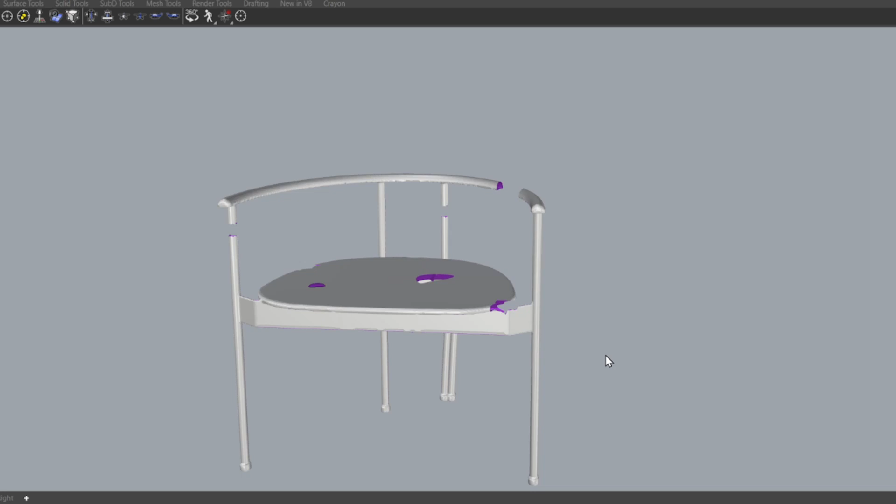In this video we'll be repairing this mesh, which has several holes, missing parts and some misalignment. So to start off with, I'll go to shaded view and inspect the holes in the mesh.

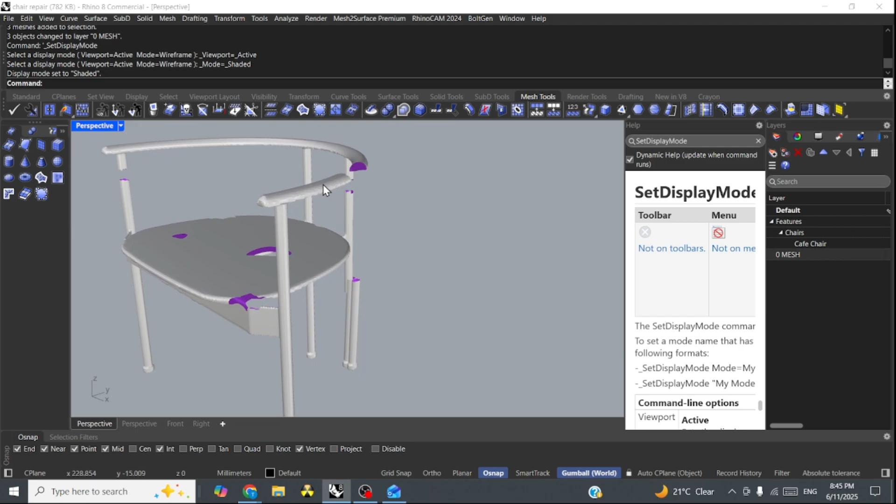So we'll just repair them one by one, starting with this one. To fix this, I'm going to sub-object select and scale to 0. Same for this one, hitting the scale button and typing 0.

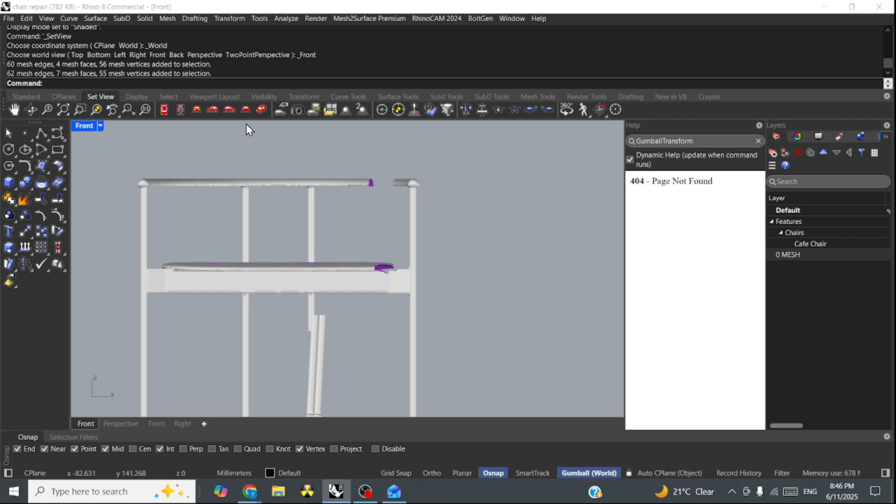This one up here, we can use the repair fill mesh hole in the mesh toolbar. You have to click on the mesh edge and it will fill it in automatically.

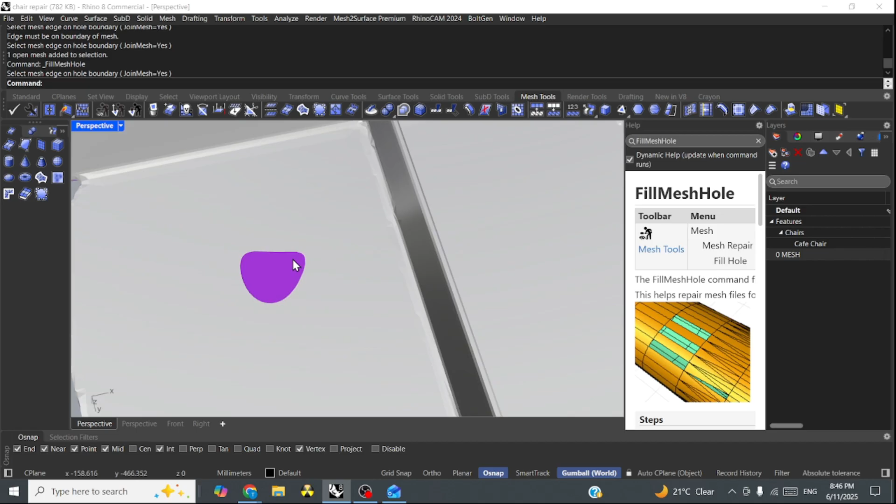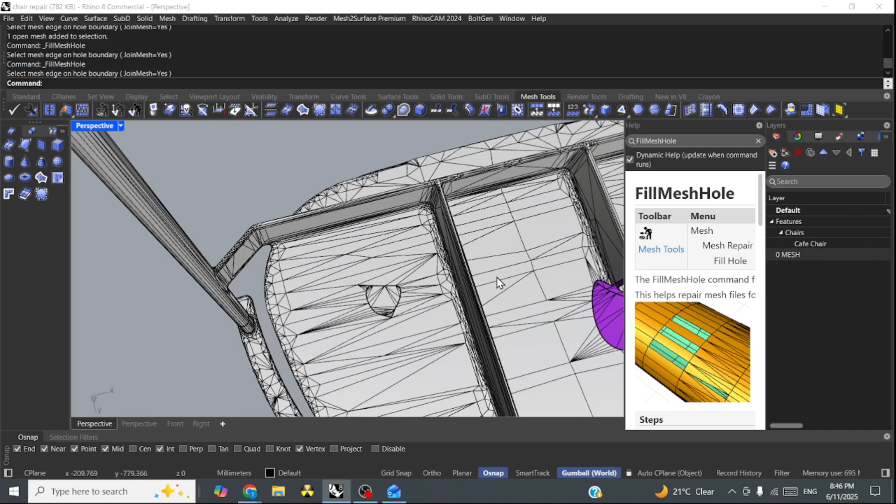Do the same for this one. If you want to see where the mesh edges are, you can turn on your mesh wires in the display tab. This can be handy for this command so you can see which edge you can click on, and also you can see the structure of the patch on your mesh.

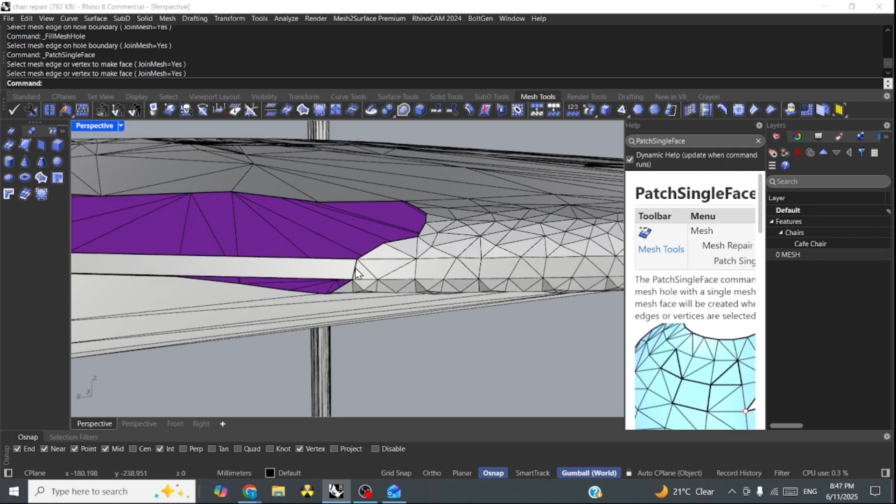Okay, we've got a bit more of a tricky one over here, so we'll use the add a mesh face. Click on that icon and then click on 2 areas and you can make a single face. We'll do it here as well.

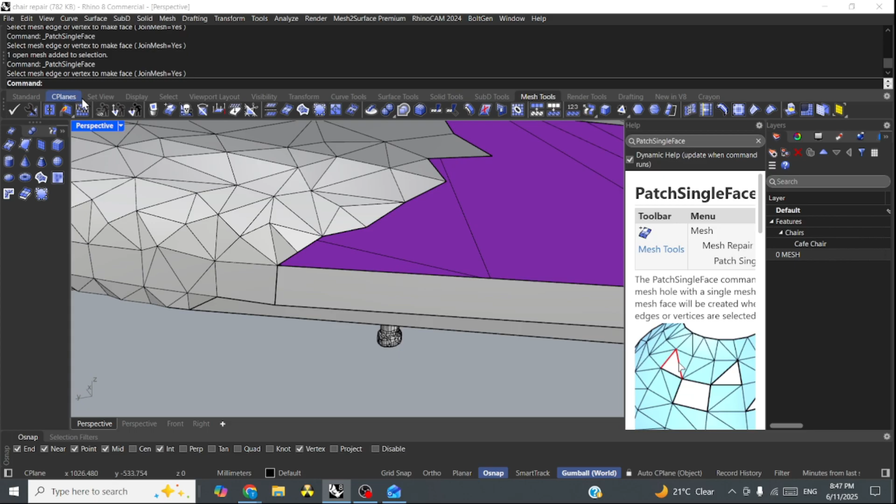Okay, and we'll just get around that corner. Then we can use fill mesh hole.

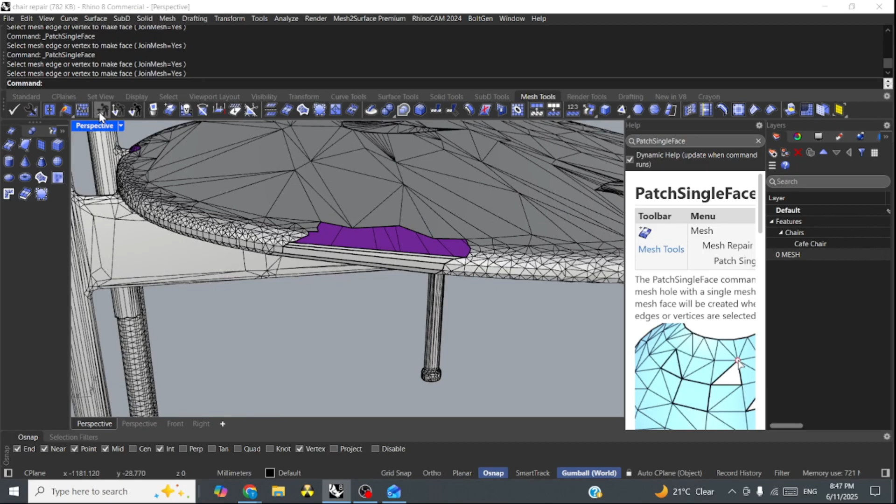Use the same technique for down here. Turn it into different segments.

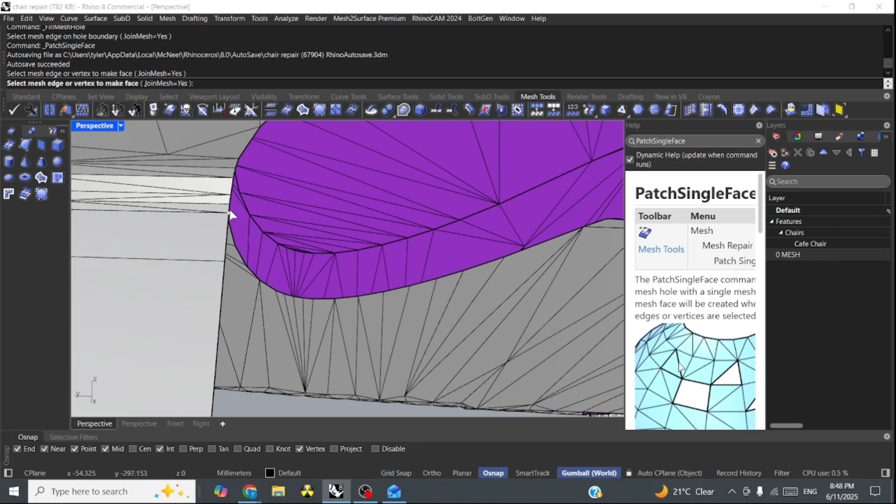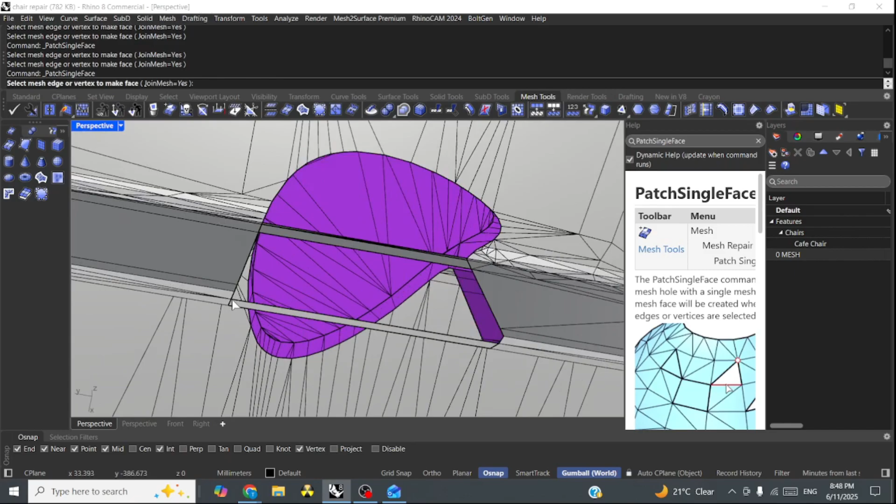I'm just using the right mouse button to reactivate the command. Just come around this corner here. Now we'll use fill mesh hole.

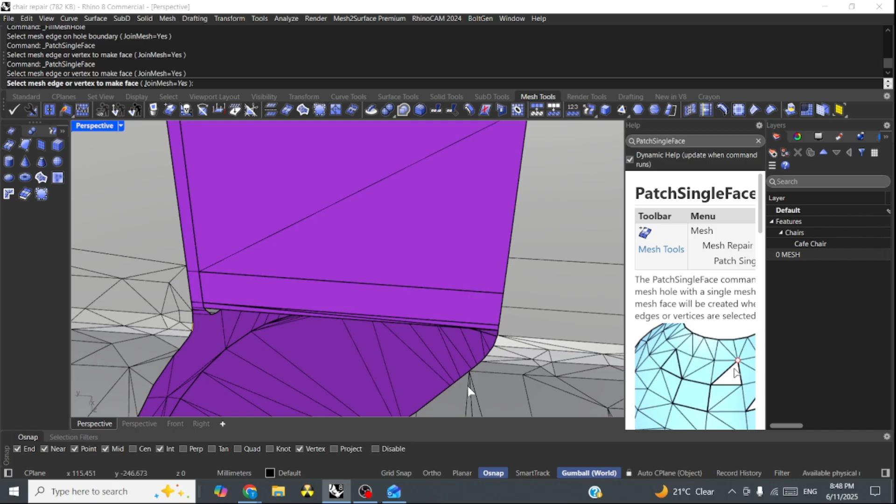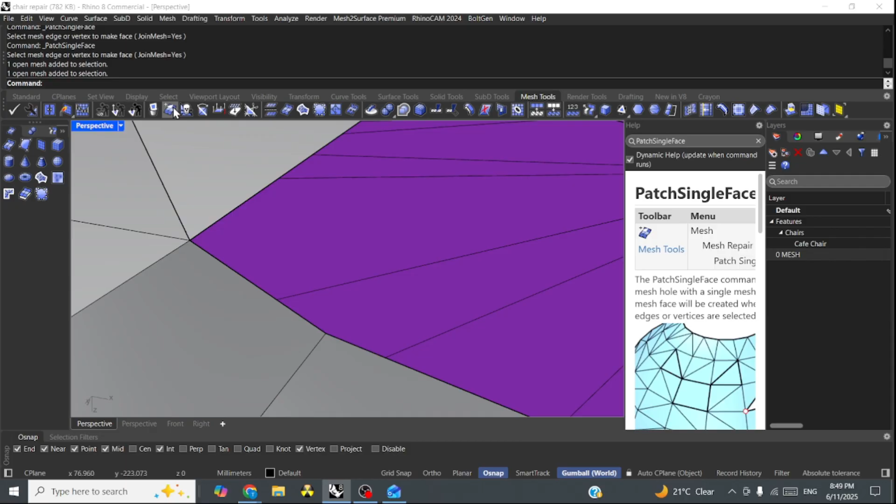Sometimes they can be a bit hard to select, so you just need to move to a different angle in the viewport. There we go. Now the fill mesh hole command should work.

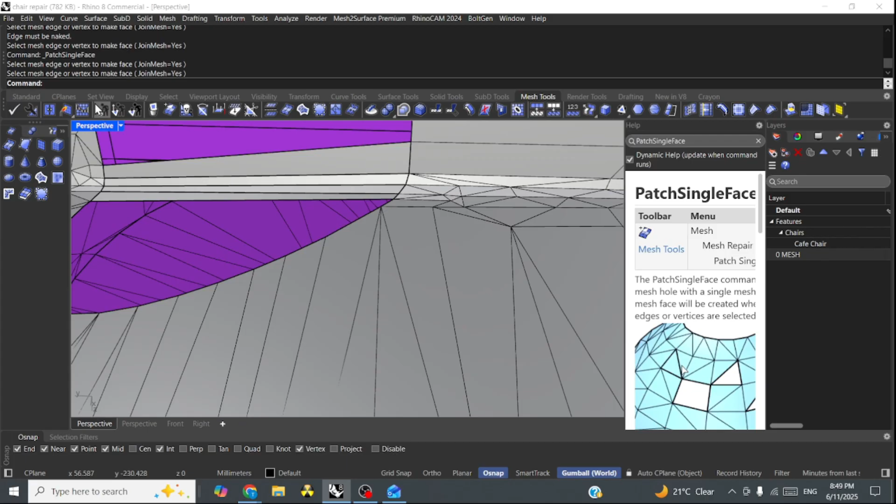Okay. Same for this side. Turn off the mesh wires.

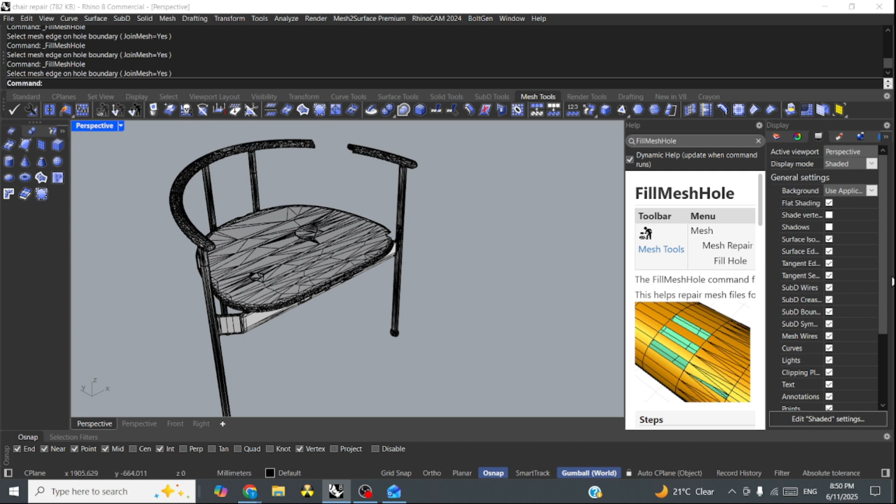So we've got a bit of a bump there. Okay, that is due to these meshes coming up to this high point. So we need to delete those,

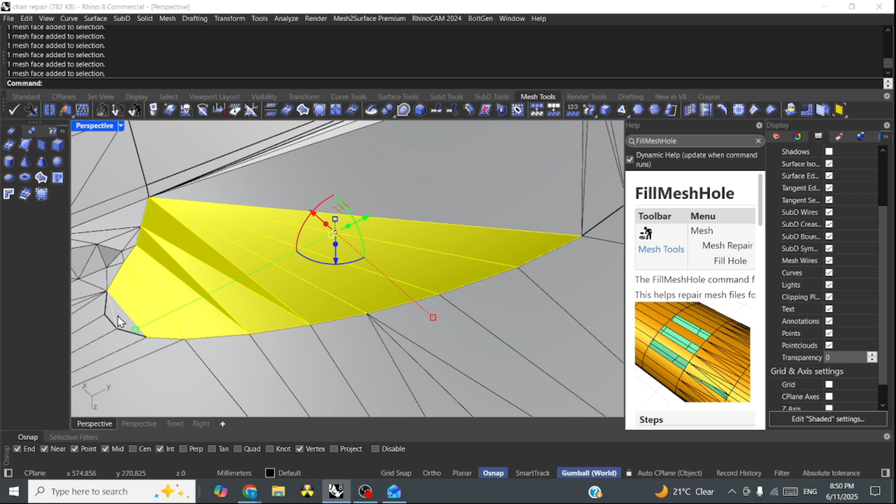just holding Control Shift, sub-object select, and okay, we need to do a little more patching here.

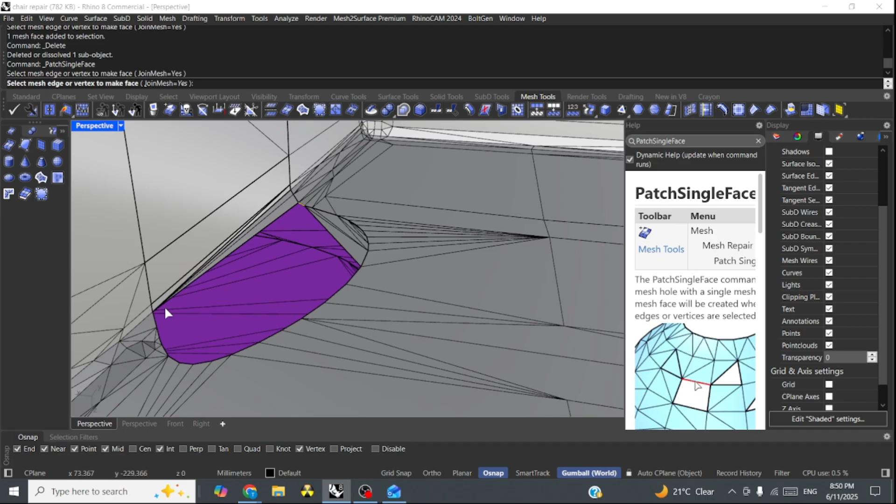So the issue there was a mesh from down here was going to a high point up there and making a bump. So what I'm doing is filling the mesh in this direction to help create the curve. I have to delete this one.

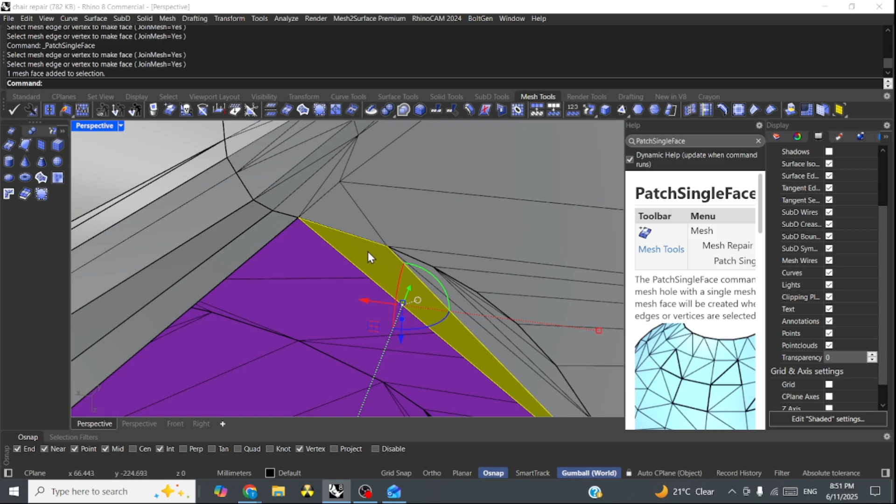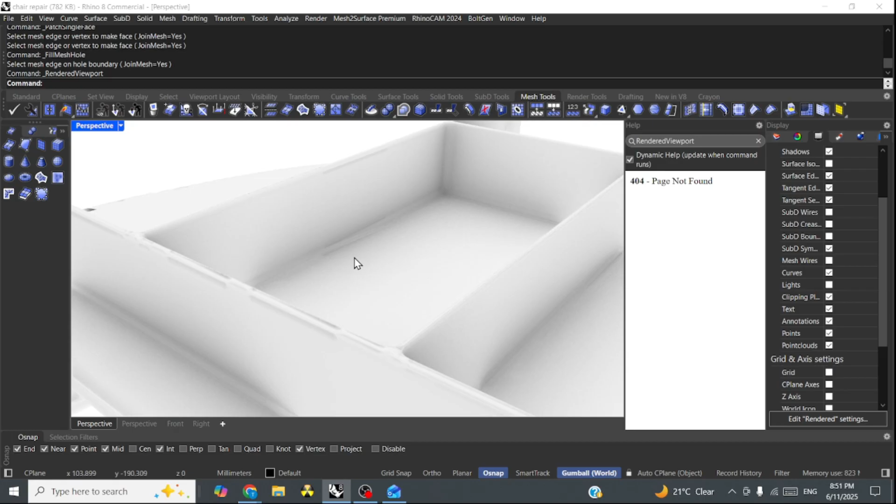Okay, and now when we fill this mesh hole, it should fill flat and smooth. Okay, that's a bit better. That's passable. That one's okay too. Right.

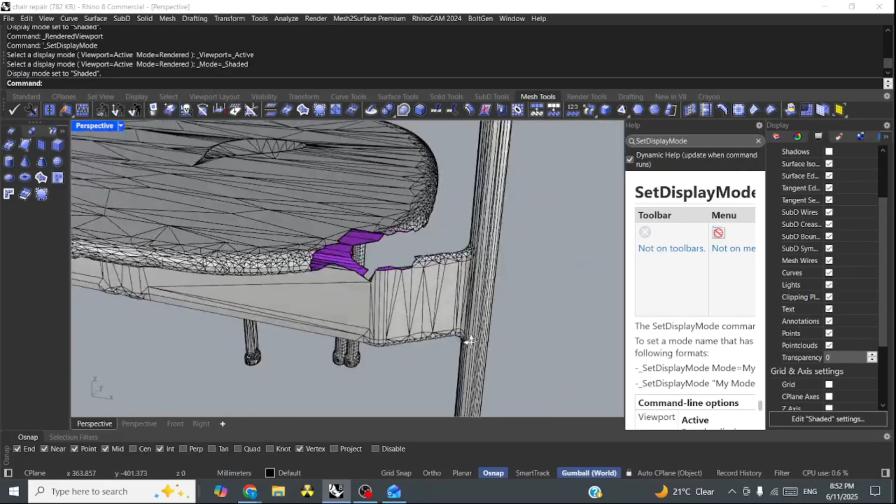Do this one next. Okay, this one's a little bit more complicated. So what I think we should do on this one is we'll take a section and now we'll isolate the section.

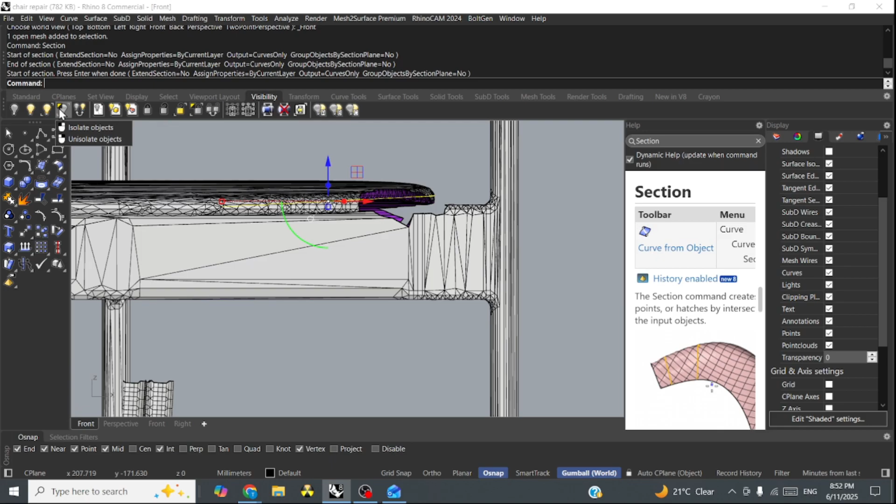Okay. I'm going to split this curve here and delete this part. Okay, now we will

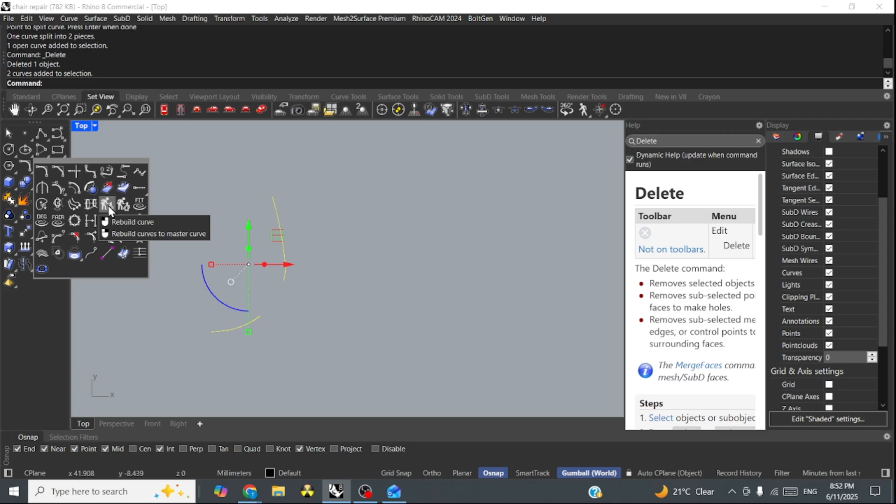rebuild these curves. Just looking for the icon. Rebuild curve. Okay, and we'll rebuild them as 10 control points and degree three. Okay, we get 0.6 deviation. I think that's okay at this stage.

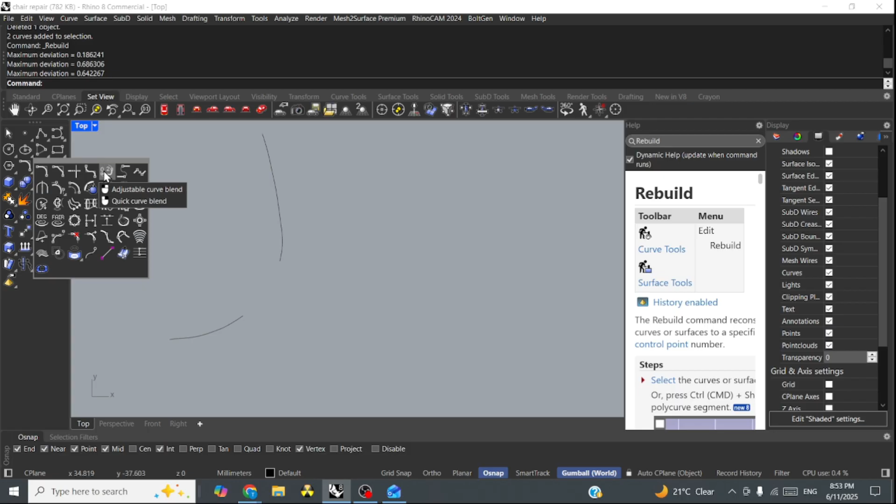Right, now we will blend the curve. Which is just here in the curve tools, adjustable curve blend. Okay, that looks alright.

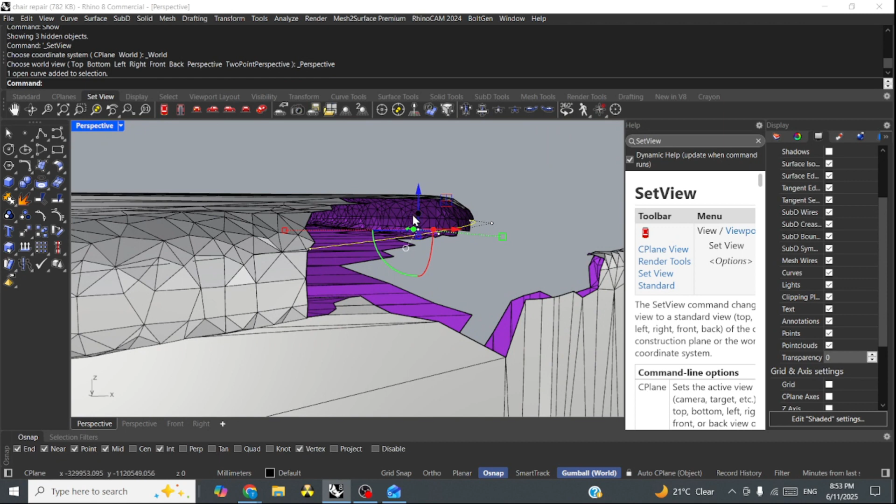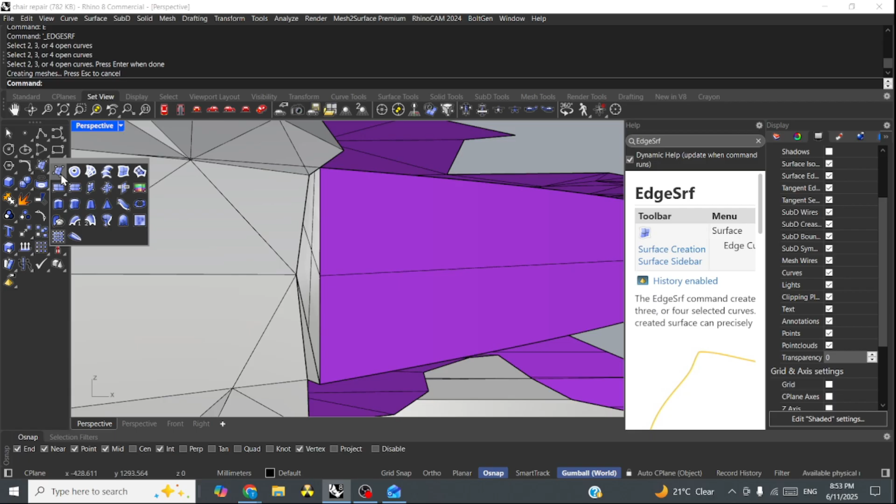Now we will show our mesh. And you can see we have a curve here. Going to go E for surface, build surface. I'll show you where the icon is. Just to clarify, this isn't a mesh, this is surface from edges.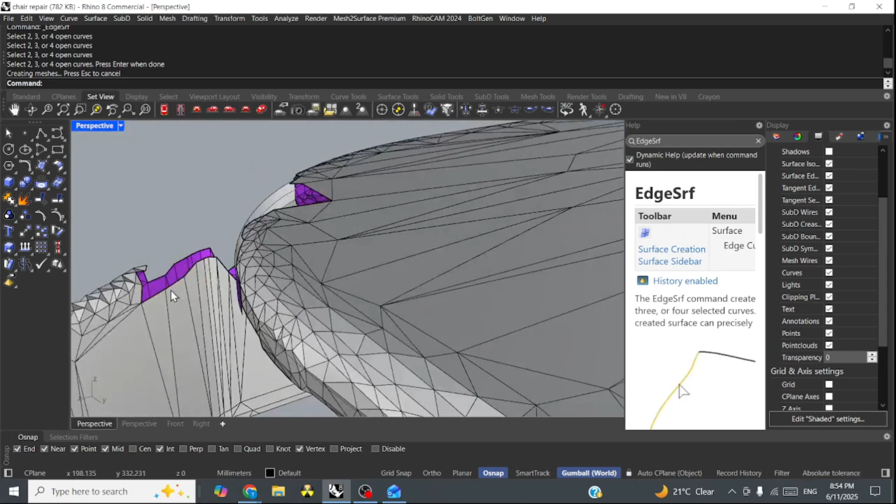Okay. This one's a bit tricky. Okay, we'll split this edge. And now we'll do a blend surface.

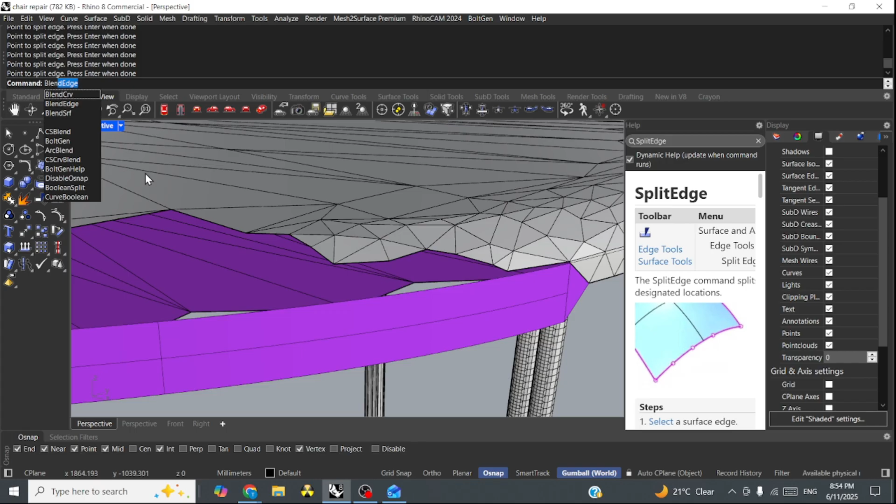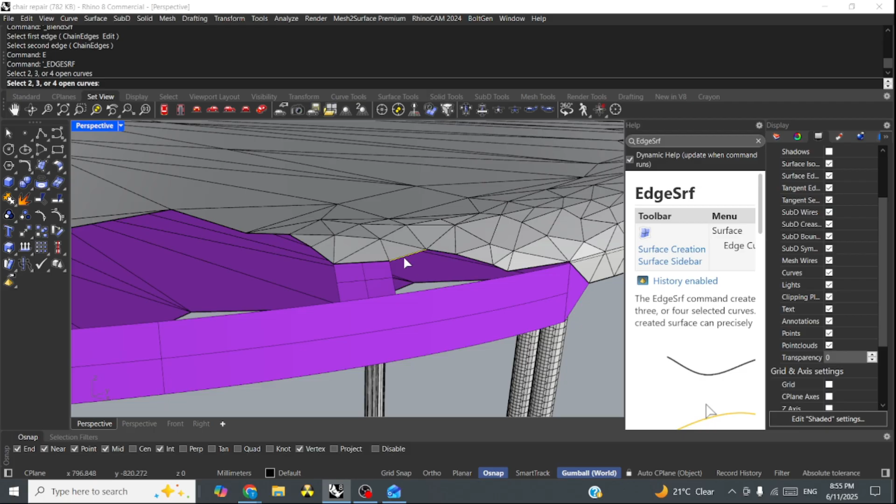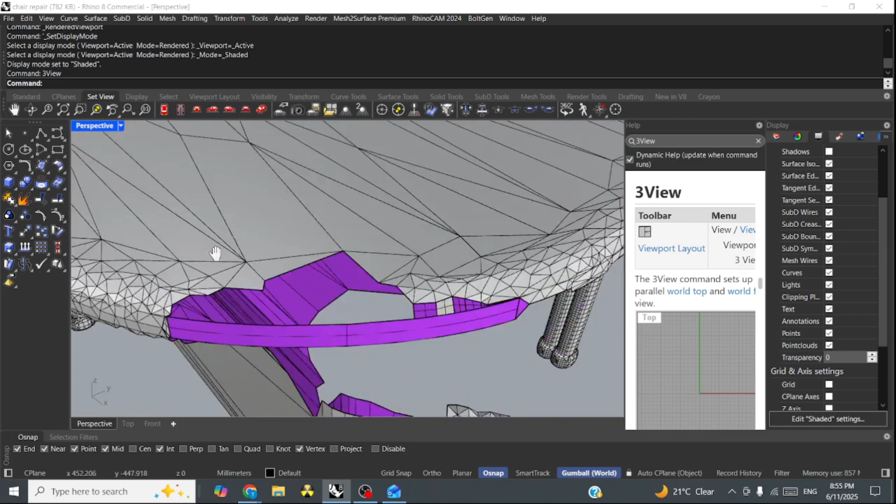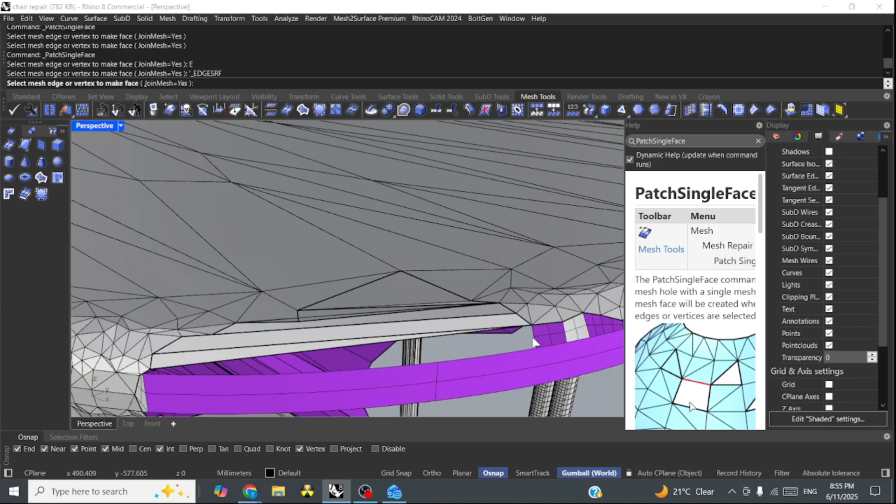Okay, now we'll do an edge surface then. Split this edge by point, split, select object to split.

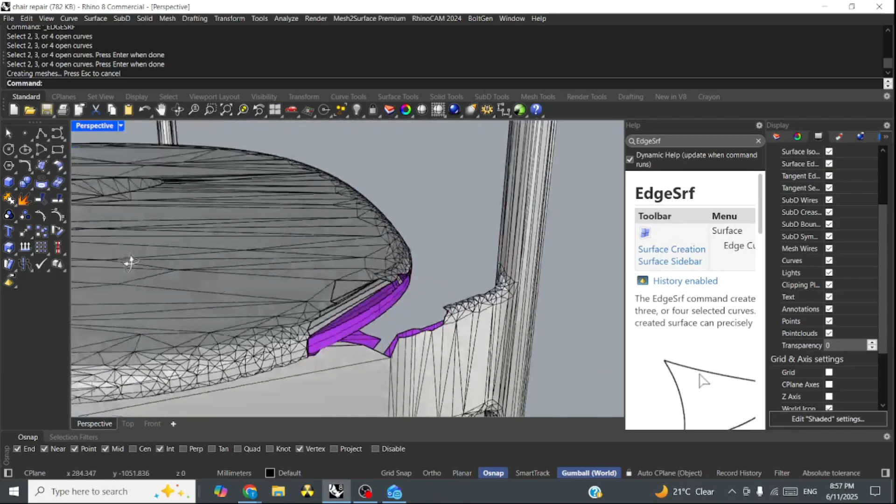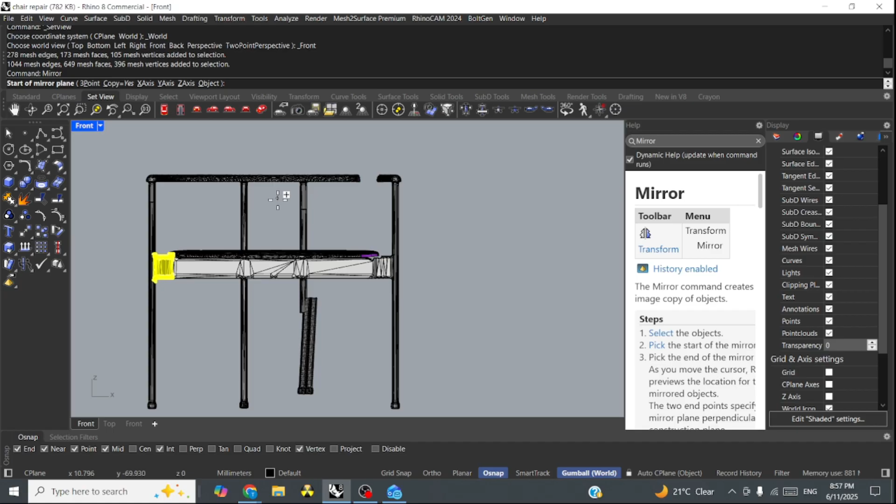Okay, so on this one we can look at this side. Because we're going to be using shrink wrap, we can cheat a little bit here. We'll copy this and we can try mirroring it. And seeing what we've got. Okay, that works pretty well.

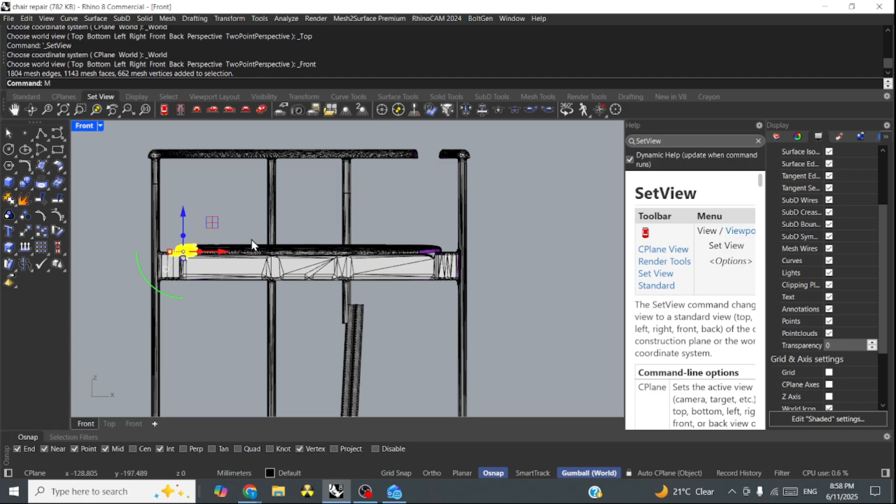Then what can we do here? We can also probably copy this little feature around there, and again mirror. Okay, that should be close enough.

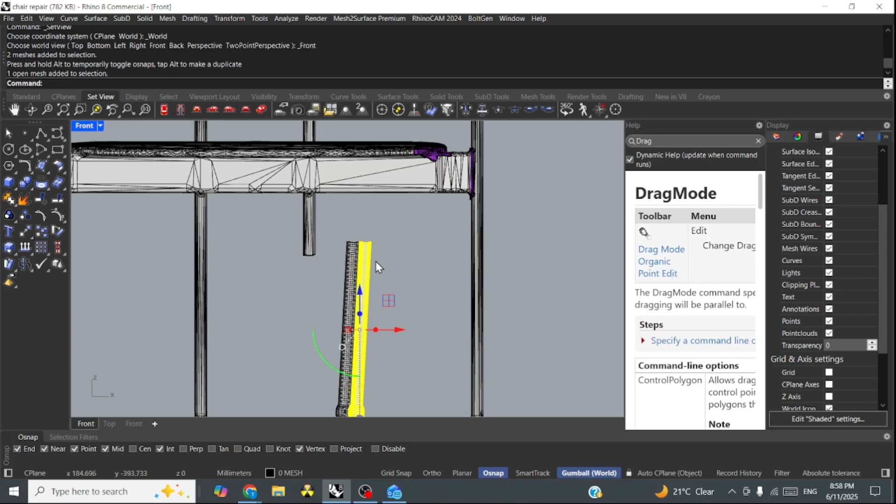Okay, finally we have this back leg, which kind of represents a shifted mesh, so we'll delete that one. Okay, and we use the rotate tool, rotate there and there, holding shift to straighten it up.

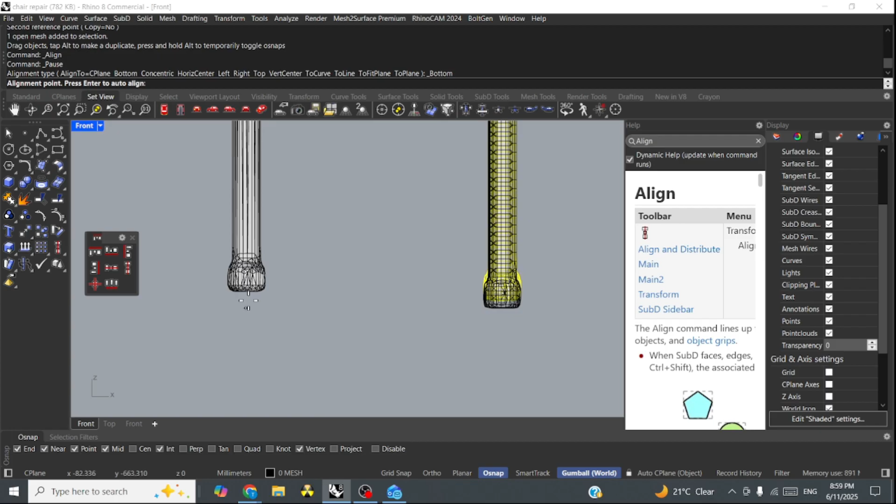Okay, I'll use the align tool to align it with the bottom of the other legs, and I'll also use the align tool to line it up to there we go.

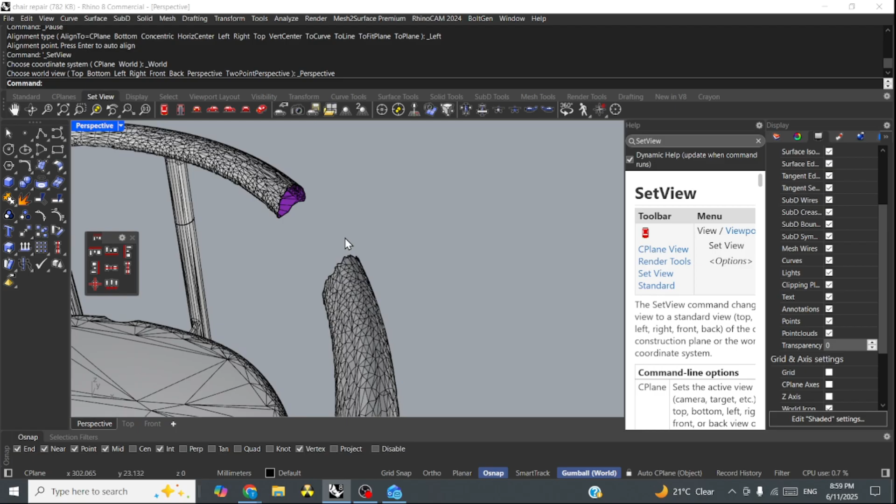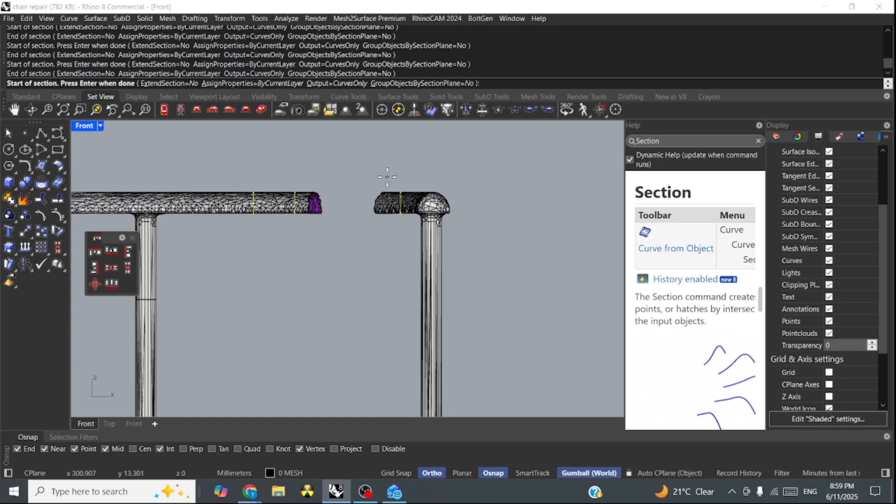Right, one more. Okay, as for this one, I think the thing to do is we'll select the mesh and we'll take a section. 1, 2, 1. Get rid of that section.

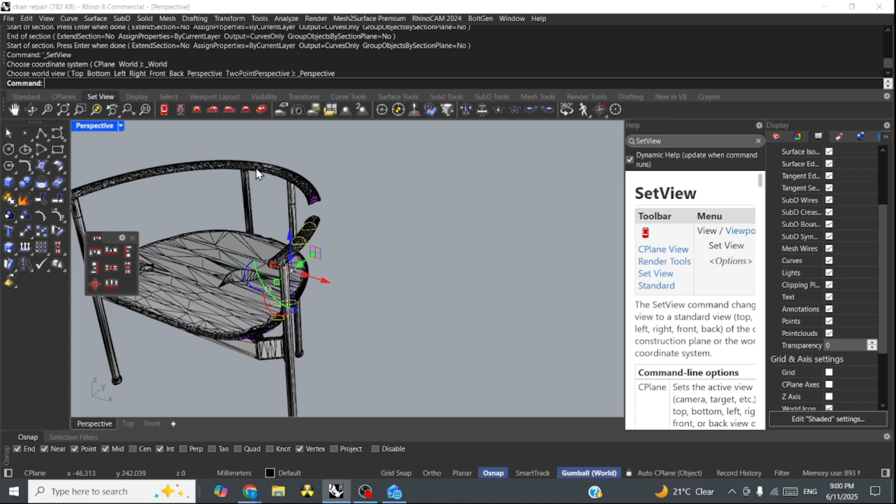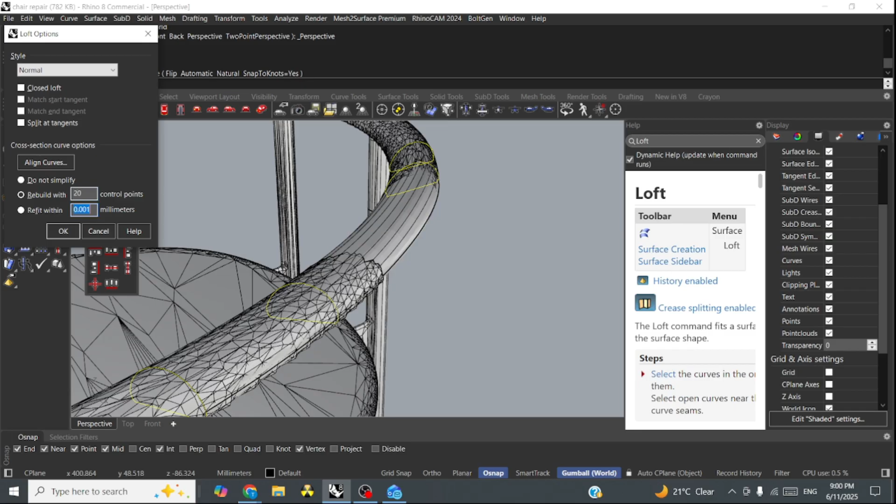Okay. Get those two and those two, and we'll loft them. Rebuild. Increase the point count. There, that's looking okay. Great.

Okay, so at the moment we have the mesh and it's got some kind of dodgy patches as well as surface geometry, and so the thing to do now is to shrink wrap it.

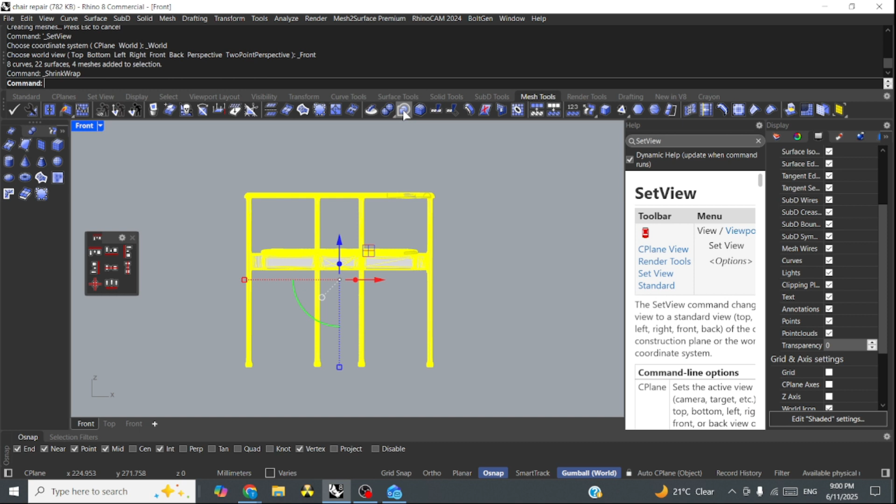So select the whole thing, and in the mesh tools the shrink wrap icon is here. Click on that, and like I always say, start with a relatively big number. Uncheck fill holes because it tends to fill small holes.

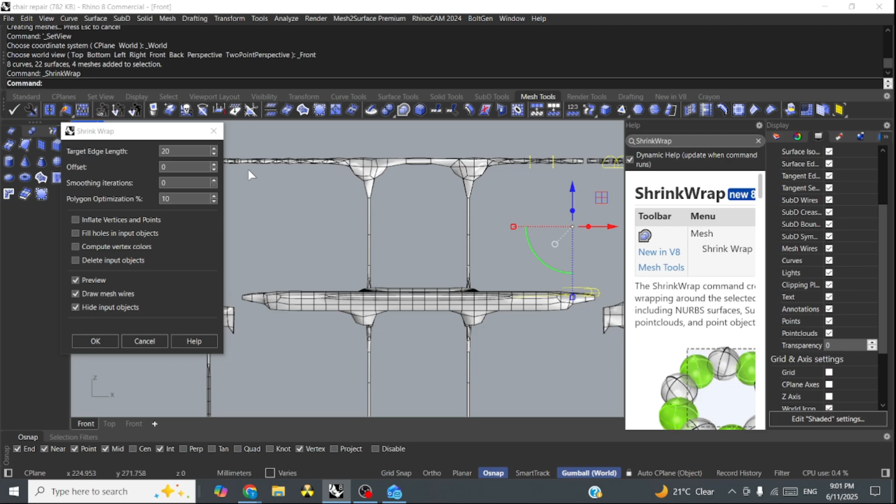That's more if you have a hole that passes through the whole job. Preview and hide input objects. Okay, this is good, so it's processing it, what we do next is we decrease the target edge length. So go down to 10, go down to 5.

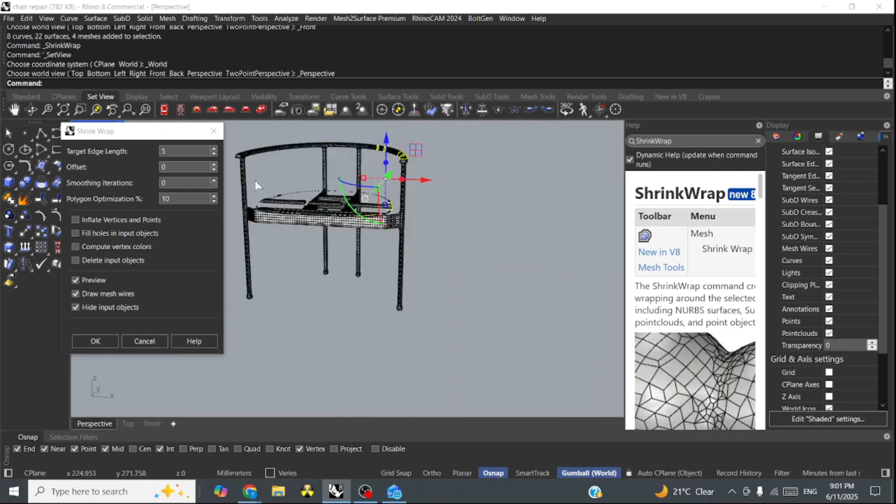Okay, and then we'll inspect the geometry, and we can see we're having some issues, so we'll decrease that a bit more. Okay, go back up to 6.

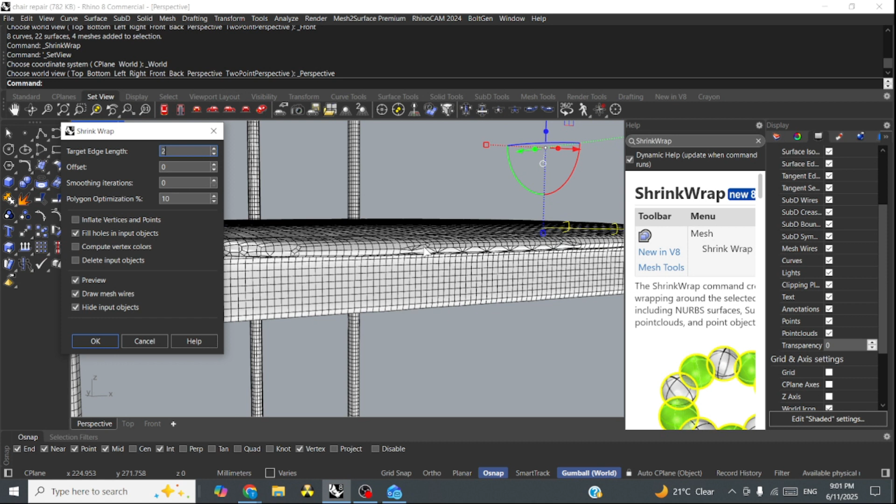Okay, this is telling us there's some holes in there that are too big, so now we can try fill input holes, and we can decrease this. Just keep playing with the number. 3, that's looking okay. Hit OK.

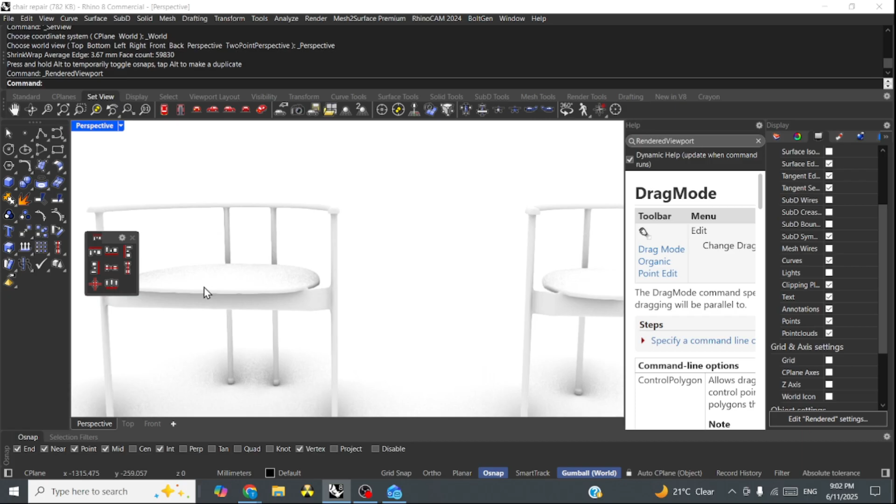And sure, it needs a little bit of work, but at least now we have a closed mesh that is 3D printable. So I hope you enjoyed this video and added a few mesh repair tools to your toolkit.